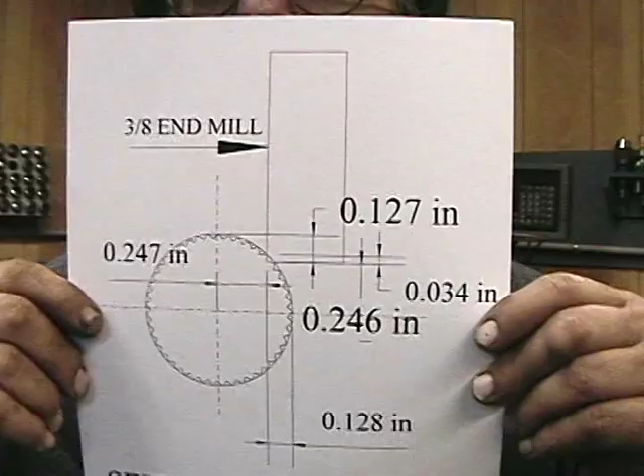I laid it out, and I'll bring this up close so you can see it. Laid it out here on AutoCAD, good old AutoCAD. Let's see, I have it right side up, yeah. Okay, you see this red right here — that right there is the representation of the end mill. And of course the center lines here, you know.

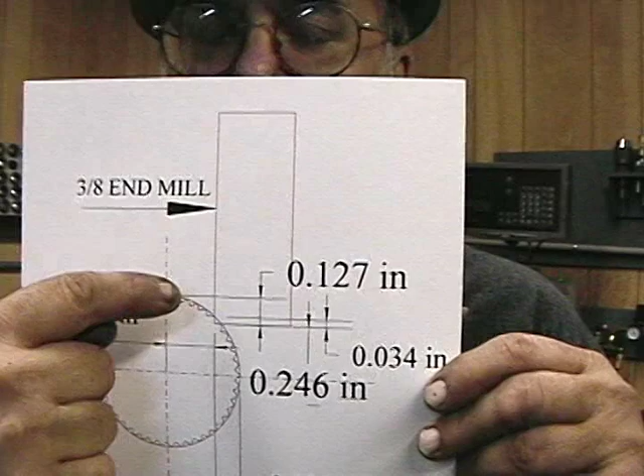Then I'm going to touch off the top very carefully, and I'll show you how I do that. Then I'm going to touch off the side over here, and zero it out. Then, according to my indications here, how much I come down and how much over, I'm going to run the whole length of that. Put my print over here.

The whole length of that all the way down. But before I do that, just to make sure I'm not going to waste the whole piece, I'm going to do about 1 inch of it all the way around to see how it comes out. Once I'm happy with that, I'm going to run the whole length of it all the way down, and I'll basically have a stick of them.

I put it in a lathe and turn them down. Drill it, bore it, tap it, chase the threads, whatever, and then cut them off with a very small, thin cutoff tool so I don't waste a lot of material. I'll have the pieces one after another. Then of course I'll have to face them off and do whatever else I've got to do on them later.

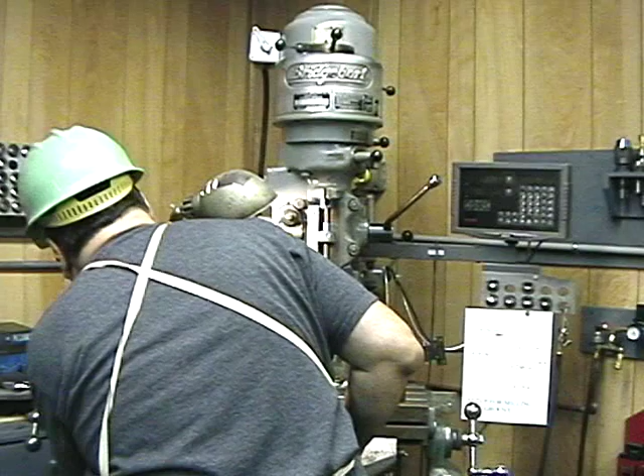But to indicate this, what I did was rough it out using just a regular square, got it pretty close to being right. Then clamped it, roughed the clamps out, and ran the indicator on the top and on the side, because on top this center is adjustable one way or the other, or down or lower, if you want to make a tapered part. That's what that's for. So you have to indicate this and get everything lined up — it doesn't matter what this is, it matters where you're cutting the 45. That's where it makes the difference.

So now I'm going to pick this up with the end mill, top and side, and cut the grooves. Now we'll talk a little bit about the indexing plate.

Now it's every 8 degrees, so the way it works out is you pick the plate number — this one is the 39 plate. I don't know that much about them, but I got it marked, and I checked it twice around.

So let's see, unlock it — 1, 2, and then back in the same hole. That's 8 degrees, shown there. Another one, let's see, why is it so tight?

Okay, one, two, back in the same hole, lock it and cut. And that's the way it works out. I checked it out all the way around.

I'm not that familiar with using an indexing head. I never really made gears back in Vo-Tech school, just bevel gears and so on, with 18 guys making the same bevel gear. Anyway, I never really had much use to make gears. Some of you model engineer guys make gears and stuff, but the truth is, when I'm designing something, I generally work around a gear that you can buy, in case something goes wrong with it you can always get another one. I try to make whatever I'm designing around off-the-shelf products.

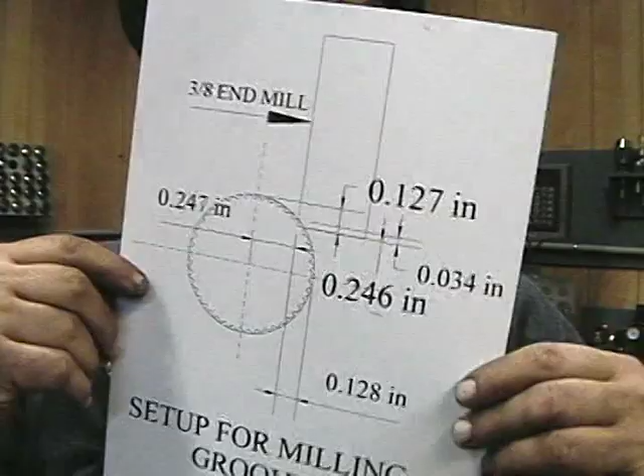Okay, now according to the drawing here, and I gotta commend CAD on this. That's Chad Aloysius Delaney, Charles Nelson's friend. Anyway, I'm going to use these dimensions to come over and get my notch.

Now you can just see the notch right, I think it's right here. You can just see that little notch. And I'm going to go all the way down.

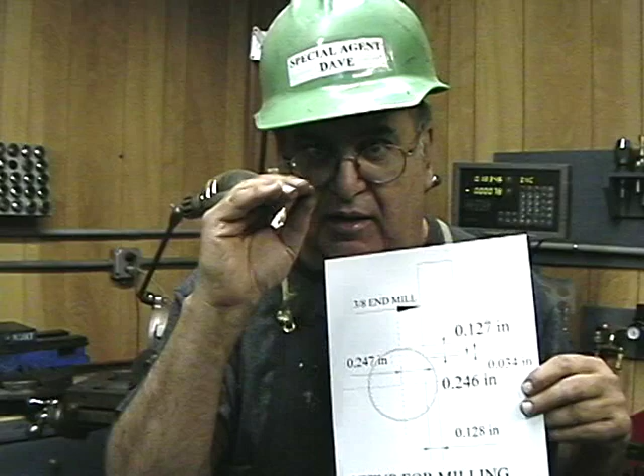Now the way I have it set up is at the top, the peak of each notch, I have a little flat. I don't want it to be perfectly sharp, because I want to be able to hold a collet, and I want it to be somewhat concentric. So we'll see how it works out.

It's not that perfect, it doesn't need to be that perfect, but I'm going to try to make it perfect if we can, because that makes the fun of it. But we don't have to worry about it. I got these rare earth magnets here, they're strong.

Okay, so now let's see, what are we going to do? We're going to come up 127, and we're going to go over 128 and 128. So let's go away. 128, 128 is right there. Lock it.

And we're on 0 here. Now we got to get back to 0. Go past it and come up to the mark. There. Okay, that's 0. That's the first cut.

I'm only going to go in about 1 inch. Okay, that's that. And then we're going to go over from 0. When I get to 0, 128.

1. There's 1. Eight. Okay, now lock that, because I don't want that to move. See, now it moves a little bit, so you got to adjust a little bit. Just bang it.

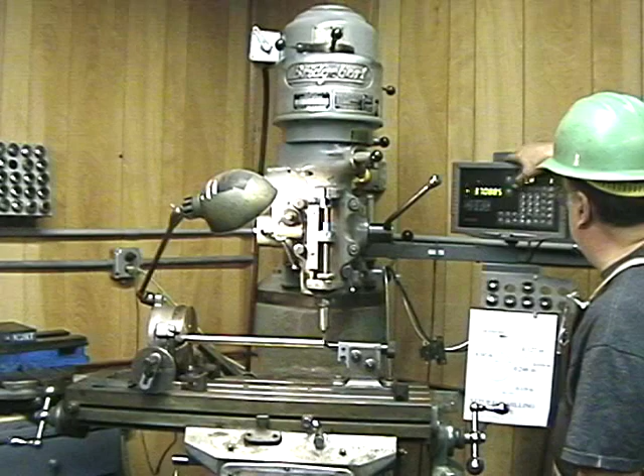So I'm going to jump up to 0, 1, which is another set of coordinates. I got 200 of them on here. So that's, I don't know, I don't have to set the X. I just have a habit of doing that when I start off. Okay, so now that's it. Let's see what happens.

Just go in a couple of turns. Okay, now you got to go 2 times around, 1, 2 is 8 degrees. So 1, 2, there's 8. Lock it. Take another cut.

One, 2. It don't have to be that tight, just snug is good enough. Snug is good enough. Alright, another cut.

Now it's a little tough to see. And another cut. 1, 2. Gotta go around 45 times.

It's easier to do it right now to just double check my work. I mean, I'm not perfect, I'm no genius, even though I might think I am. Anyway, I make sure I always double check everything rather than waste all the material, I'll make sure it's right.

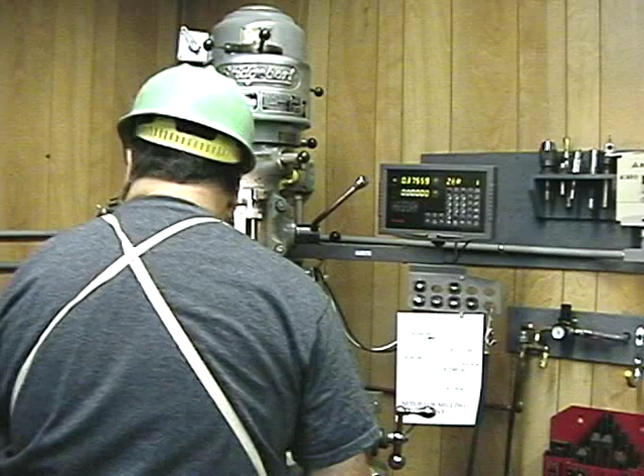Okay, make 2 turns, back to the thing, get over here, start, and go down. Right in the same groove, should be. Nothing's been moved. There you go, cutting all the way down.

Looking good, looking good. I really enjoy this. I don't know why anybody would want to run automatic machinery, CNC stuff. You could have that thing so it automatically indexes over here while you're playing Monopoly or something. This is the enjoyment of doing the part yourself. There's a certain amount of conveniences, like I have automatic feed, I can sit there and turn it by hand, and I have a readout or things like that, but to actually make the part and have somewhat hands-on is where it's at for me.

Everybody says, why do you keep harping on CNC? Well, because I think in our hobby, in the model engineering hobby, you should really make the parts yourself. So it's the enjoyment for me. Well, keep cutting. I don't know how long it's going to take me. I'm going to time it.

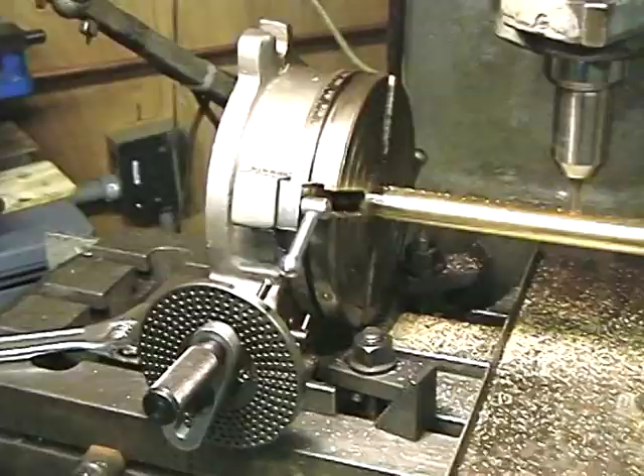I just timed the last cut. At the beginning, I started the stopwatch, went all the way down, went out, came all the way back, reset it for the next one and went down. As I started it, I shut the clock off. It's 5.5 minutes per cut. So times 45, 250 minutes divided by 60 minutes, tells you how many hours. About 4 hours to do it.

But I don't have to be here 4 hours straight. I can work a couple of hours, make a few cuts, stop. Always make sure you finish, completely done. Stop, get ready to do the next one. Make a note if you have to. Come back in 2 days, do it again. So we're going to continue to keep cutting them. When I'm all done, I'm going to have a nice bar of blow-down rings.

Well, one thing I wanted to mention is this little gizmo here that comes with the indexing head. And this works for any indexing head. This one just has to be hooked up on a rotary table. I've got all the different plates here with different amounts of holes, like 20 holes, 15 holes - they're all odd numbers. What you do with this little thing is, let's say you have the first pin there and you're making a cut. Now, while it comes around, you run this around to there, and the next time it comes around, it goes to that hole. And then you just keep spinning it around.